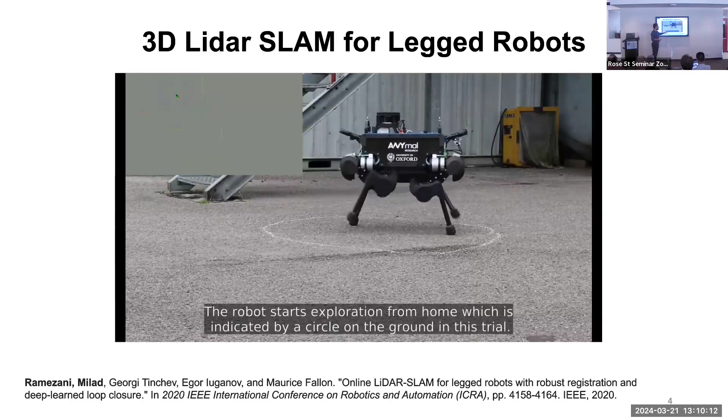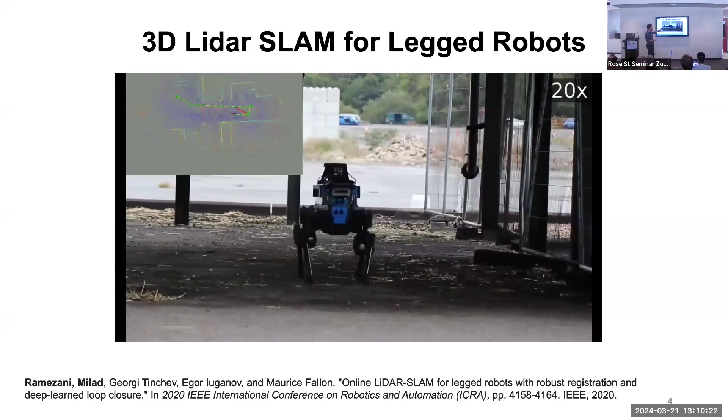The task was: the robot started at home, indicated by a circle on the ground, and the mission is it has to go back to that place autonomously at some point. Currently, we were teleoperating the robot.

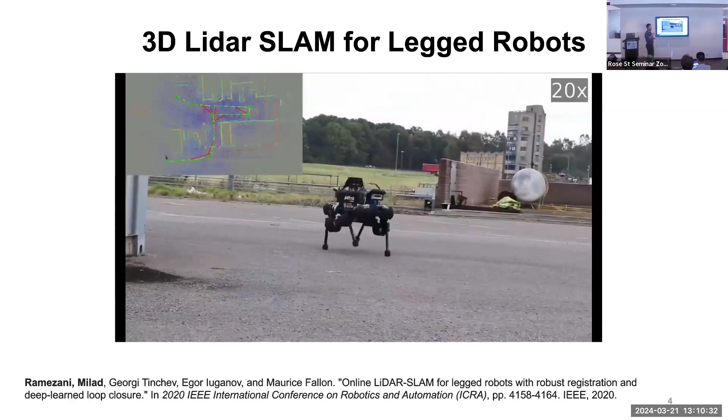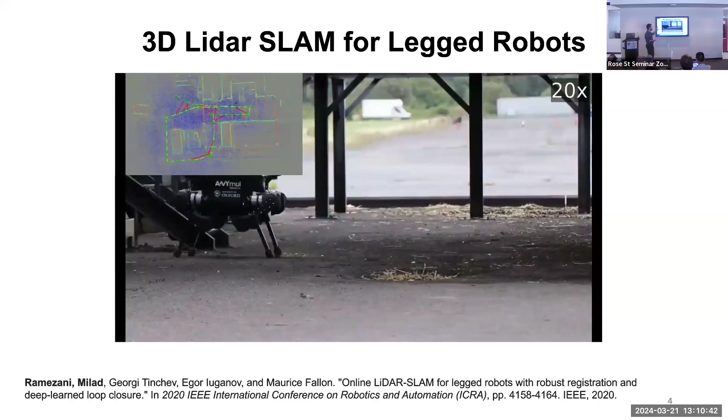The robot goes into the environment, and here you see once a loop closure is detected, those red edges indicate loop closures in the 3D lidar SLAM. The robot revisits the environment again, and again we have more loop closure edges, resulting in a globally consistent map.

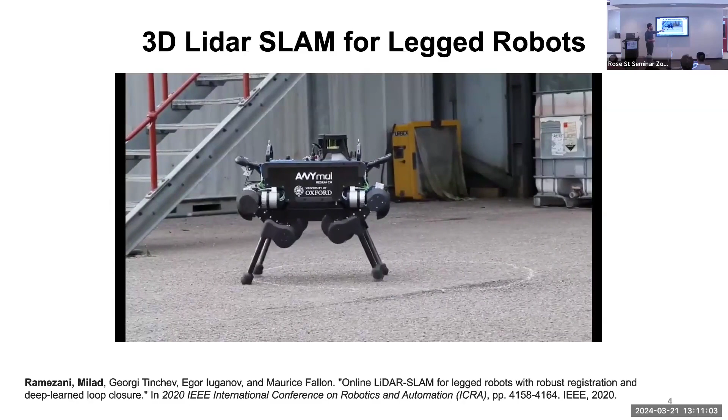At some point here, we requested the robot return home, and the robot autonomously, by taking advantage of those loop closure edges, finds the shortest path to return home. And it relatively ended up within the circle.

With that experience and knowledge I gained from Oxford University, I joined CSIRO, where I became familiar with Wildcat.

Maybe you've heard of Wildcat. I'm going to describe it briefly in the upcoming slides. Wildcat has really nice capabilities, one of them being multi-agent capability. Building upon these capabilities, we basically unleashed our ambition.

Now the target is addressing tasks such as multi-agent SLAM, multi-agent navigation, accurate mapping like HD maps, semantic understanding of the environment at a city scale, at a larger scale, as well as multi-agent re-localization without putting any kind of constraint about the location of the robots in the environment.

So robots share information at some point, and then basically they should be aware of their location relative to one another.

A little bit about lidar SLAM. Maybe you've seen these slides, because during my talk at ICRA 2022, I went through these slides. But briefly, Wildcat is a lidar inertial SLAM system.

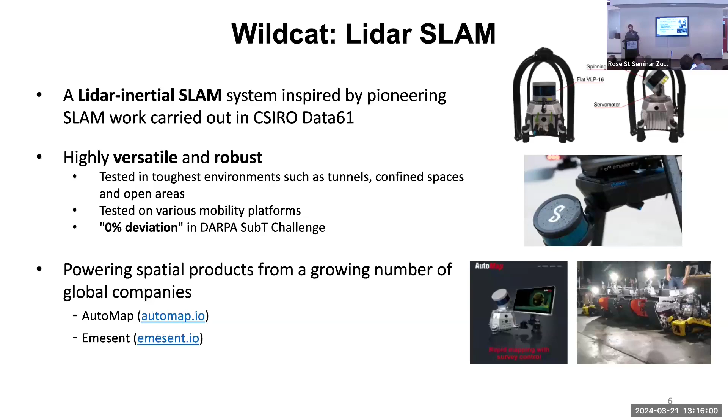Based on these two perception packs, we collected a massive data set across our site, QCAT in Brisbane, indoors and outdoors. We have diverse environments: a sparse forest area, dense forest area, structured environments, and also we went through the buildings, multiple storeys, very confined areas, like staircases, challenging SLAM systems.

We uniquely deployed and mounted these retroreflective targets across the site, and in a sweeping action, we tried to scan these targets to be visible in the maps. Then we detected these targets, and these targets were measured using surveying tools, so we have ground truth and the measured position of these targets. In total, we could detect 63 targets across the site, and based on these targets we could compare or evaluate maps.